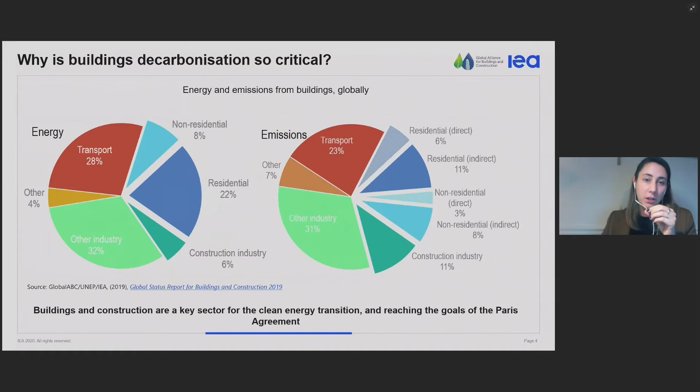Martina touched on this. This is data from the Global Status Report. The reason we're looking at the buildings sector is because buildings and their construction account for a huge part of today's global emissions of carbon dioxide. Almost 40% of energy and almost 40% of total emissions. It's responsible for a huge share of our emissions, but with that huge share also comes much potential for reduction.

If we look at the emission savings potential of the building sector in ASEAN, India, and China combined, this is a figure from the IEA's World Energy Outlook analysis, and it shows that under the policies stated so far, the stated policy scenario, total emissions in the region would increase by about a third by 2040. But with increased ambition on energy efficiency and renewable energy deployment, total emissions from the sector could actually be reduced by two-thirds of what they are today, all while still ensuring universal access to clean cooking and electricity, supporting continued growth in GDP and floor area and access to energy services.

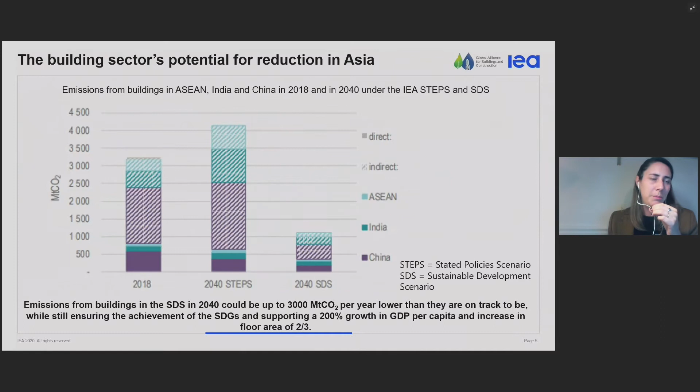If we look at what this scenario would look like, the Sustainable Development Scenario, we see that this would be supported by a fuel mix transitioning from coal to increasing amounts of renewables, so PV, wind and hydro in the region. This would support growth in electricity consumption in buildings, all while maintaining continued growth in per capita electricity consumption and increase in floor area.

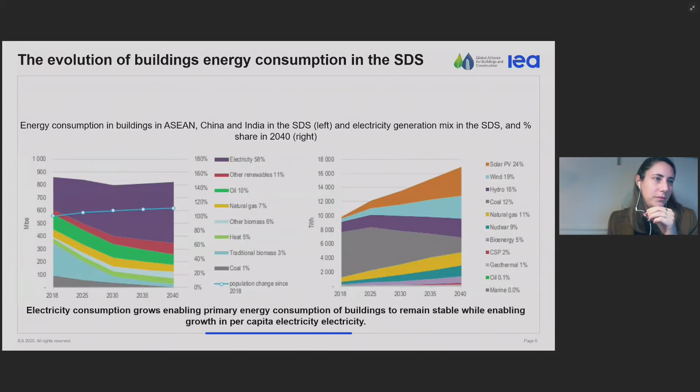As well as being a crucial sector for reducing emissions, buildings are also vectors for achieving several other important benefits, such as providing more thermally comfortable environments which are conducive to better well-being and higher productivity, more affordable and accessible energy services, resilience to climate events, more livable and equitable cities, and increased resource efficiency of materials. The building sector is really where we can unlock all of these different benefits.

Buildings will also be key in interfacing with an increasingly variable renewable power system. They'll increasingly need to provide flexibility. And, as is particularly important in current times, the buildings and construction sector is a huge employer, as Martina mentioned, and holds significant potential for stimulating economic recovery, even more so if this recovery is a green one. We'll be discussing that in more detail later on.

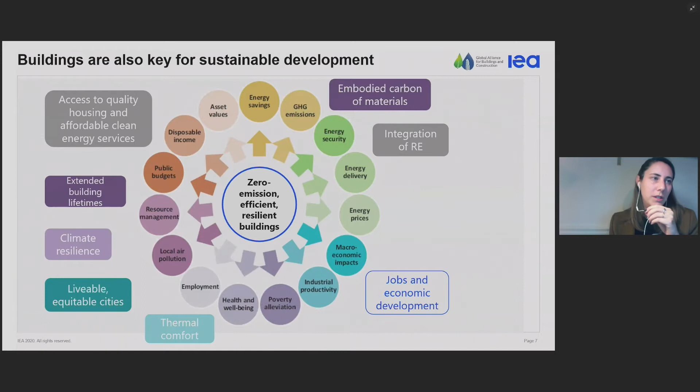In order to understand how to unlock these benefits and develop a common vision for how to work across this large value chain towards achieving net zero carbon buildings, we've been working with the GlobalABC to develop these roadmaps. In total we engaged with about 700 stakeholders across the three regions to build out timelines for each of 8 key themes, spanning urban planning, new buildings, existing buildings, building operations, appliances and systems, materials, resilience, and clean energy, to really capture all of the different facets of the way that buildings impact on energy consumption.

For each of these themes we looked at what is the current status and what is the vision to 2050, setting milestones for the short, mid, and long term. What we found overall was that there is ambition to strive towards net zero carbon buildings by 2050, and there are many excellent examples from across the regions of effective policies across all of these different topics.

We also uncovered the wide range of multiple benefits that motivate different stakeholders and the wide range of stakeholders that there are. But we also saw that there's a strong need for increased integration and coordination across disciplines and across different levels of government, and a need for more mandatory regulatory policies and more data to create baselines from which to develop more targeted policies. We also found that building materials and resilience stood out as topics most in need of data and information, and this was across the three regions that we looked at.

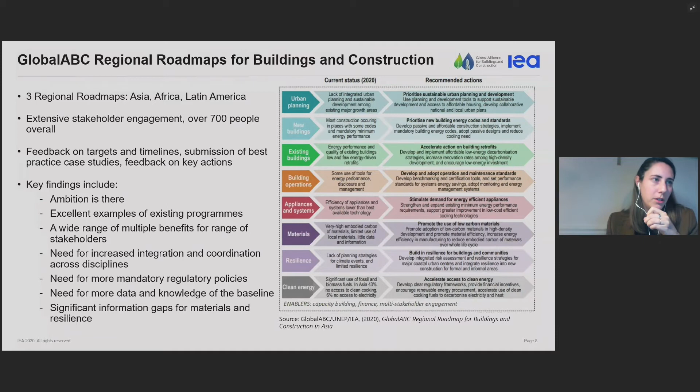So the way that we developed these roadmaps was starting from a 2016 version of a global roadmap. And then that's when we started the process to regionalize these, starting with Latin America, Africa, and Asia.

The methodology was to develop a survey from which to collect information from a wide range of stakeholders in the building sector, to collect information on current status, good policy examples, and performance of technology. We also hosted a series of online workshops and some in-person events, like the Singapore training for green buildings that I mentioned earlier.

We also held a regional roundtable in Bangkok and a meeting with several stakeholders in New Delhi, India. Through this network of stakeholders, we engaged with them to get feedback on our draft. So we had several versions and received feedback on the timelines and the measures proposed.

For each of these 8 themes, the structure was similar. We looked at regional trends on that theme, summarized the key actions, identified the key stakeholders, and then identified policy timelines and regional examples. So what are the key policies and what are the short, medium, and long-term targets for those policies?

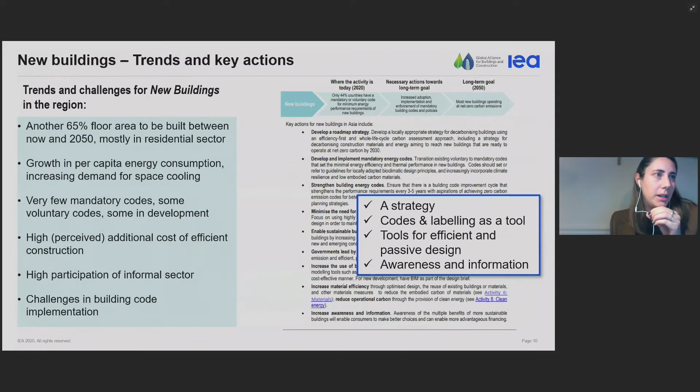Next slide, please. These are examples of the timelines that I mentioned. On the left, we have the policy timeline. The types of policies we talk about in new buildings include building energy codes, but also the aspect of compliance with building energy codes, participation of the informal sector, labeling of building components, building passports, life cycle analysis, and incentives. These were the priority policies that are key to reaching net zero carbon buildings.

You'll see in bold there are 2 sets of targets. In bold is the target for the region, and below that is an aspirational target, recognizing that regions have diversity in terms of some cities being more advanced than others, and some countries being more able to deploy certain policies than others. So we have this 2-tier normal and aspirational target to show these different pathways.

We also identified for each of these topics where there was a lack of information to be able to set a target, or a lack of consensus around what the stakeholders thought would be an adequate target. These are shown in orange, and in red are where we found what we called an ambition gap, where stakeholders did not think that, for example, carrying out life cycle analysis was going to become mainstream by 2050, when it's actually a really important tool to enable better design decisions. That's the sort of model used across the 8 themes.

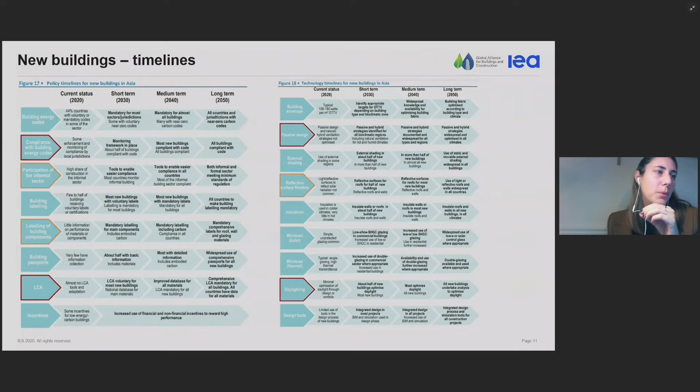Next slide, please. As I mentioned, we also collated examples of programs and policies that we found across the region to showcase some of the really great initiatives already underway. Under the new buildings chapter, we have examples from India, China, Malaysia, Korea, and Singapore, with some links for more information. Next slide, please.

As I mentioned, for each of the sections we also have a subsection on finance, capacity building, and multiple benefits. This involves identifying the most relevant financial mechanisms to deploy the identified measures, and looking at capacity building priorities, categorizing them between training required within government, training of professionals, training of the financial sector and developers, general awareness, and training of product material manufacturers. We also identify the relevant multiple benefits of that sector to use as evidence for implementing these policies.

Now I'll talk you through the highlights of the other sections to describe what sorts of policies are discussed. Within urban planning, for example, we know that Asia Pacific is home to many of the largest cities on Earth and large populations exposed to extreme weather events and climate impacts.

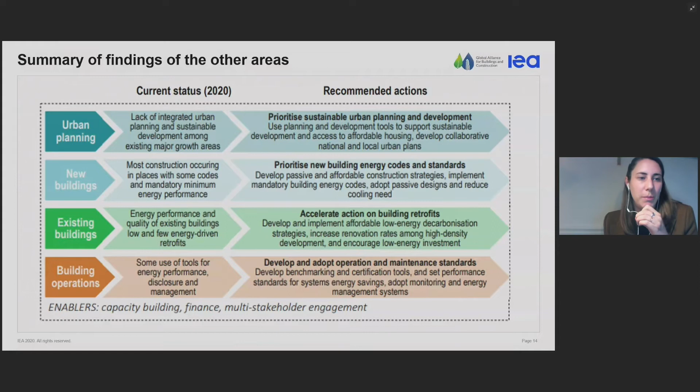In terms of appliances and systems, we talk about setting regularly updated, robust minimum performance standards, combined with comparative informative labeling to facilitate consumer choice, and implementation of incentives and procurement policies to boost efficiency across the entire market and increase access to these appliances. This was an area where regional collaboration for standard and testing harmonization was highlighted as very effective, as is already the case with the harmonization of AC performance standards.

In materials, we're looking at embodied carbon, improving production methods for construction, and identifying and developing low carbon alternative materials and construction techniques. Here the lack of data was quite significant in identifying specific measures, so focus is particularly required on information disclosure and tools to build up this database and enable life cycle decisions to be taken.

Resilience was about adapting cities and buildings to the adverse effects of climate change. The key measures here were about risk mapping and monitoring, development of integrated resilience strategies, and development of preventative measures against water damage and extreme heat.

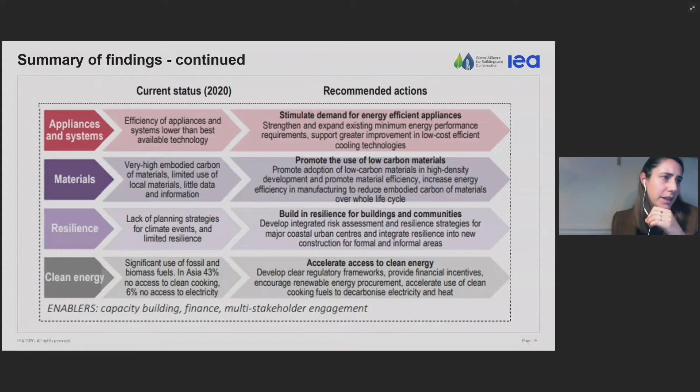I just wanted to pause here and acknowledge that this work was undertaken before the COVID pandemic, and explore what that means.

The public health crisis and economic crisis have actually only strengthened the reason why efficient and healthy buildings are so important, and how valuable the multiple benefits we saw earlier really are. The IEA and the International Monetary Fund worked on a report this year called the Sustainable Recovery Report, in which different measures were analyzed for their contributions to a green economic recovery.

Buildings efficiency consistently came out on top for many reasons: the jobs created are local, measures are often very labor intensive, they can be deployed quickly, and they support the improvement of homes and critical infrastructure such as schools and hospitals. Here we see a snapshot of that analysis showing the amount of jobs created per million dollars of capital investment, and buildings efficiency retrofit and efficiency in new buildings comes out on top.

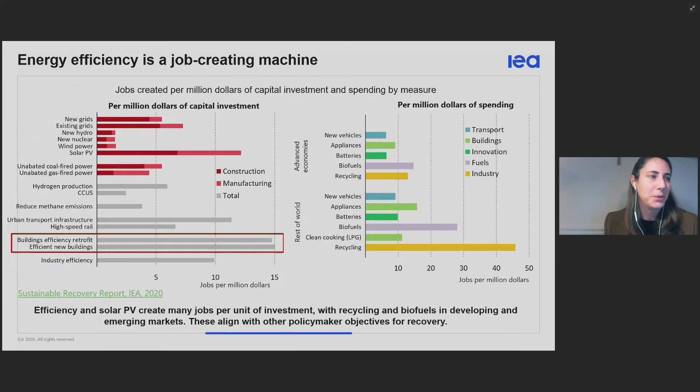So we think this is an opportune moment to boost investment in buildings efficiency and clean energy, and we're looking forward to discussing this later with you in the panel, in the discussion, and through the polls.

We really hope that this process and these documents, the regional roadmaps, will spark regional dialogue and collaboration across these regions, inspire concrete actions and national strategies for decarbonisation and economic recovery, keeping in mind that these measures are in line with the design features of stimulus measures being devised at the moment. We also hope they'll highlight the need to fill the critical information and vision gaps identified in those documents.

The immediate next steps for the IEA: we've already started on a roadmap for mainstreaming energy efficiency in residential buildings in India, and we're also here today to discuss the ASEAN roadmap for buildings and construction and the ASEAN roadmap for space cooling. This is in complement to the other initiatives that Martina has mentioned in Cambodia and in Vietnam. I'll stop there and look forward to answering any questions during the panel discussion.

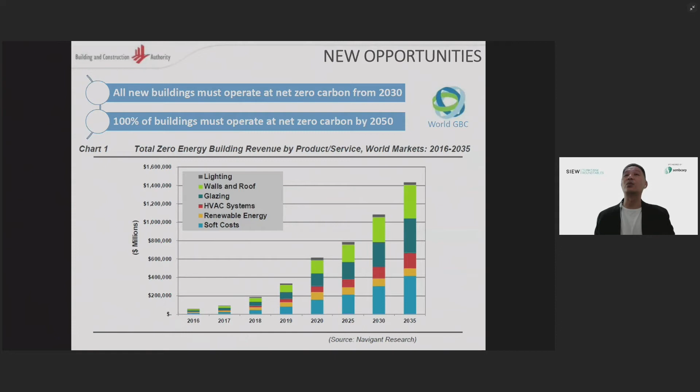So what can we do to overcome these challenges?

Focus on greater building energy efficiency. Back in 2018, the Super Low Energy Program was launched by Minister Lawrence Wong at the International Built Environment Week. This is part of the Building and Construction Authority's continued efforts in green building development since the launch of our Green Mark scheme in 2005.

He outlined the ambition of pushing building energy efficiency towards 80% from 2005 levels by 2030. To achieve this, three key activities were highlighted as instrumental to the success of the Super Low Energy Challenge, namely the SLE Technology Roadmap, Green Mark for Super Low Energy, and the raising of industry capabilities and awareness. I'll go through a bit more about all of these initiatives in detail in the next couple of slides.

But before I do so, let me explain what Super Low Energy is. Using Green Mark as a reference, where Green Mark is a performance rating tool on the environmental sustainability of a building and has a minimum energy efficiency that has to be met, which is code compliant.

For building owners or developers who are more ambitious, they would strive to achieve greater energy efficiency or savings and be certified under Green Mark Platinum, which represents a 50% savings from the baseline. For Green Mark Super Low Energy, it requires an even more stringent energy savings of 60%.

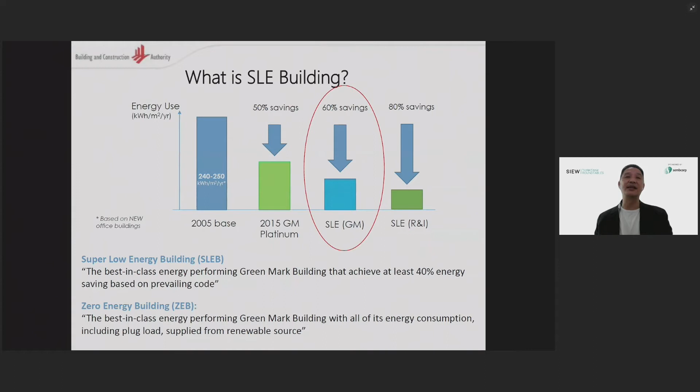To help us achieve SLE, BCA, in collaboration with the industry and academia, developed the Super Low Energy Technology Roadmap. It outlines the broad strategies to help the industry design and develop cost-effective SLE buildings.

The roadmap identifies a range of technologies. When put together, we will be able to achieve SLE. The technologies are grouped into four broad areas, namely passive strategies, active strategies, smart energy management, and renewable energy, where more than 60 technologies have been identified, some of which will still need to be developed through R&D.

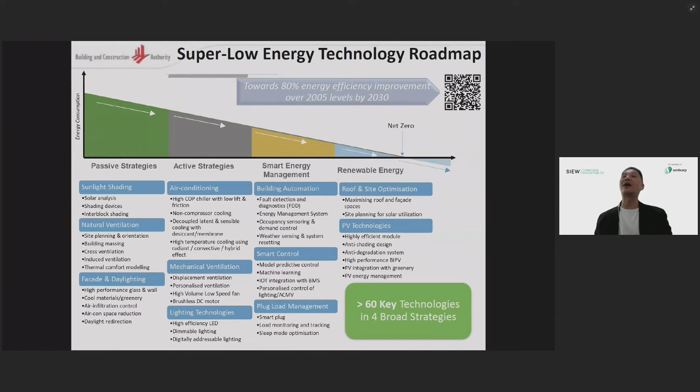The other strategy is to drive large-scale adoption via the Green Mark scheme. This serves as both a recognition of the developers' or building owners' efforts and also for greater deployment of technologies, which is essential to scale up adoption.

The Green Mark scheme, coupled with green building policies and incentive schemes, have been instrumental in stimulating the growth of green buildings in Singapore, with 42% of our gross floor area green, and with a target of achieving 80% by 2030. By adding the SLE component, it would emphasize the commitment of developers and building owners to strive for greater energy efficiency.

To date, we have certified 41 Green Mark SLE buildings, which includes new and existing buildings, with 14 ongoing SLE projects.

Various seminars and workshops were conducted to bring the industry up to speed on SLE. There were opportunities for completed R&D projects to be showcased to industry partners to collaborate and take up the technology. More than 20,000 participants have attended our events.

Site visits were organized to share best practices by some of our forerunners in the built environment, and outreach efforts through our periodic publications.

So how can we help? To achieve these targets, BCA adopts a systemic approach to drive R&I within the industry, from formulation of roadmaps to successive stages of R&D, providing test-bedding platforms such as the BCA Skylab, and to the establishment of standards such as mandatory requirements under Green Mark to drive adoption.

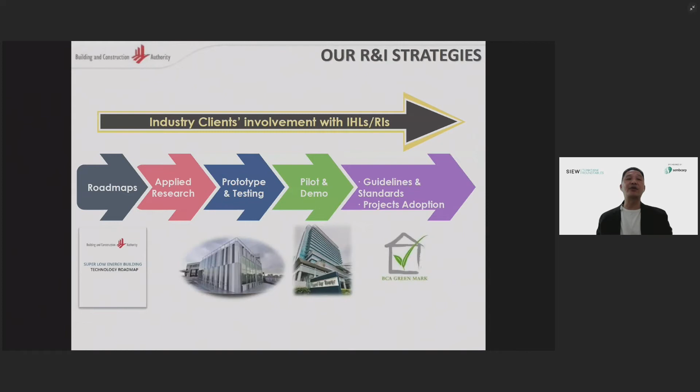Which brings me to the GBIC, which is an integrated RD&D program to drive innovation of green building technologies, including SLE technologies. It was launched in 2014 and funded by the National Research Foundation. It covers R&D, testing, demonstration, knowledge sharing, and stakeholder engagement.

It will help to drive SLE by accelerating the adoption of promising building energy efficient technologies and solutions in actual projects. So far, the GBIC has awarded more than 30 R&D and demonstration building projects.

For R&D, the GBIC focuses on industry-driven research and innovation centered around technologies in the SLE Tech Roadmap to develop practical and cost-effective solutions that can push technology boundaries beyond the current best-in-class performance by 20% or more. Examples of previous GBIC Innovation Challenge calls include the Smart Building Technologies, where 8 projects were awarded last year, and the recent Alternative Cooling Technologies in partnership with the Coolest SG Consortium, where 5 projects were awarded.

Supporting our out-of-lab test-bedding, the BCA Skylab plays a critical role to help validate the performance of technologies in real-world conditions. Modeled after the Lawrence Berkeley National Labs, the Skylab was launched in 2016 as an advanced outdoor test facility for green building technologies in the tropics.

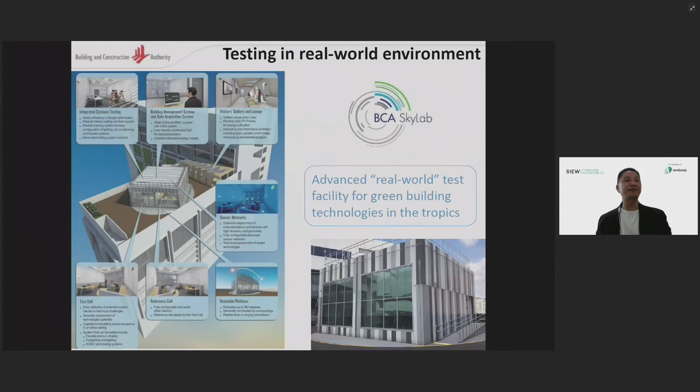To help these technologies move up the TRL scale, or technology readiness level, the GBIC demo was put together to encourage building owners and developers to demonstrate innovative energy efficient technologies in actual buildings. Through successful demonstration, these technologies will be replicated, scaled up and adopted, and eventually go overseas.

Such demonstrations will also help us in our policy formulation, such as raising the baseline, for example mainstreaming SLE with the help of innovative and validated technologies, and also introducing annexes on specific technologies in the Green Mark schemes, which will score additional points if implemented. Most importantly, these demonstrations will provide useful data for setting new benchmarks to help raise the standard within the built environment.

To promote and bring innovations closer to market adoption, the GBIC demo supports large-scale pioneering of promising energy-efficient technologies in actual buildings to validate their performance. These promising technologies could include completed R&D projects from our universities or research institutions, or emerging technologies from industry that have yet to see wider adoption in Singapore, to be pioneered in developers' buildings to showcase practical and replicable solutions.

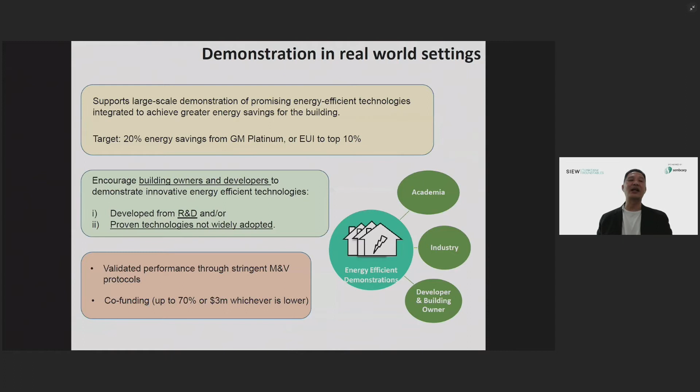By integrating these technologies, the demonstration project should achieve performance of at least 20% energy savings from Green Mark Platinum standards, or top 10% EUI for building typology. This performance is measured with data collected from an array of sensors and meters following international performance measurement and verification protocol standards.

In the next couple of slides, I'll be sharing some of the SLEB exemplary projects demonstrated in Singapore, starting with the Zero Energy Building at the BCA Academy. This is Southeast Asia's first zero energy building, retrofitted from an MEP workshop - mechanical, electrical, and plumbing. Repurposed as an office and institutional building, it adopted more than 30 technologies to reduce energy demand and generate renewable energy via solar PV.

Some of these technologies have seen commercial adoption, such as the underfloor air distribution system and passive displacement cooling. With all these technologies integrated, the Zero Energy Building achieved an exemplary energy performance of 83 kilowatt-hours per meter square per year, about 67% energy savings from the 2005 baseline. In the past 10 years, it has served as a demonstration and educational platform for the industry, academia, and the general public, receiving more than 35,000 visitors.

With the launch of the SLE program, the Zero Energy Building underwent an upgrade to remain relevant to the industry, aiming to achieve 73% energy savings with further reduction of energy use intensity by leveraging emerging technologies. We are able to push the Zero Energy Building to become a positive energy building with 40% energy surplus production by end of 2020 by refreshing our solar PVs.

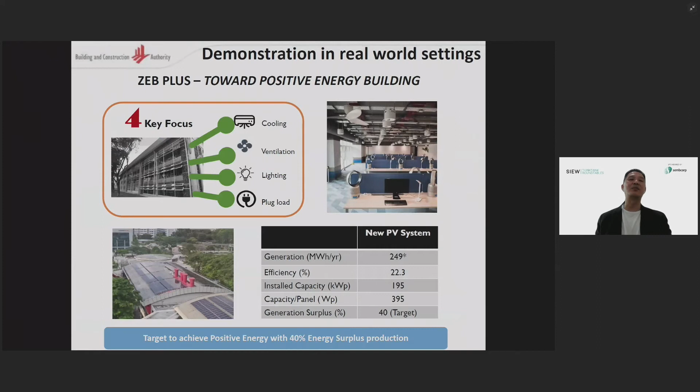Well, could we come to the end of the presentation please, because we're a bit over time. Yep, okay, sure, no problem.

So the next couple of slides are some examples of SLE projects - I'll just run through quickly. What we have here is a mid-rise zero energy building in the city center, which is the SMU Connexion.

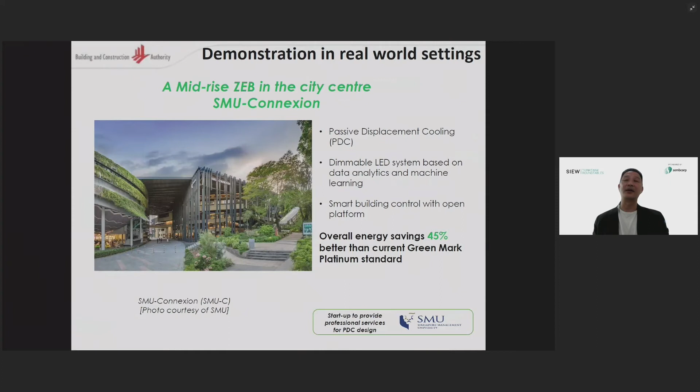It's a 5-story project that's able to achieve net zero with energy efficient technologies such as PDC as well as rooftop solar.

The Keppel Bay Tower project, which received a lot of media attention, was one of the first existing commercial buildings to take up the SLE challenge. They deployed 5 technologies that were solicited from a challenge call together with BCA.

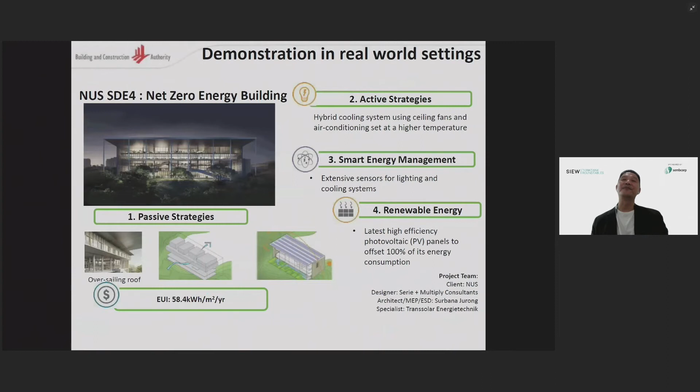With the successful R&D demonstration projects, we also want to showcase all these successful projects with the wider public audience through our Smart Energy SLE Smart Hub portal, which is actually available online. You'll be able to see information on these projects.

There'll be a technology directory where building owners can source for technologies that have been demonstrated before, a smart advisor that will give building owners a high-level assessment of the SLE potential, and lastly a building dashboard which will provide information on various building types for building owners to benchmark against.

So that'll be the end of my presentation. Thank you.

Thank you so much, Noel. I think it's pretty impressive, the richness of the examples that there are already, and the message is very clear: it can be done if you put your minds and your means to it. I'd like to compare it to how Singapore managed the water issue, turning what was a weakness into a real strength.

Let us hold that thought as I turn to Vietnam. Ms. Kim Tor is the Senior Program Officer of PEEB, the Building Energy Efficiency Program, working out of the GIZ office in Vietnam. She acts as technical project and policy advisor to the Ministry of Construction. In the past 20 years she has held different positions providing technical assistance in the buildings and construction space, both at the national and subnational level. She reviewed the Vietnam nationally determined contribution roadmap for a low carbon, climate resilient buildings and construction sector in Vietnam, Vision to 2050, and co-authored key studies including feasibility on green financing for energy efficient and low emission housing, and non-monetary incentives to promote energy efficient and low emission housing in Vietnam. The floor is yours.

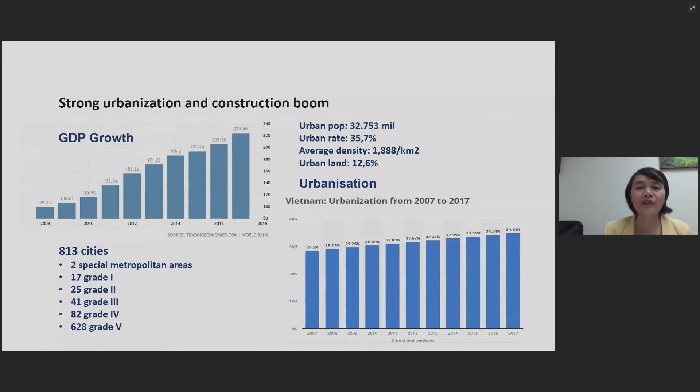Seeing these circumstances, the government has very much awareness that we have to act now in many dimensions, that our growth needs to be more green. So the Vietnam Green Growth Strategy and Action Plan for the next 10 years is now under revision. We have had it for the last 10 years already. And now more action needs to be done at the sectoral level, so that action can really be deployed at the sector. And now we're talking about our construction sector.

So the government is now also doing amendment on our Law on Environmental Protection, LEP, and the government is also revising our Construction Law and the Law on Housing. Our efforts now, in order to make use of the NDC building and construction roadmap, is to try to incorporate those concepts into our law revisions so that low carbon building can have a name, a terminology, into our law text, the body text of the law, so it can really be put into effect rather than only studied, researched, or demonstrated.

We want this program to happen in this country. And in order to do so, the Ministry of Construction just last month already issued the action plan on implementation of the Paris Agreement within the building sector - the first one in the country. While the government still puts it under the umbrella of the Ministry of Natural Resources and Environment? The building sector has already made its own action plan for implementing the Paris Agreement.

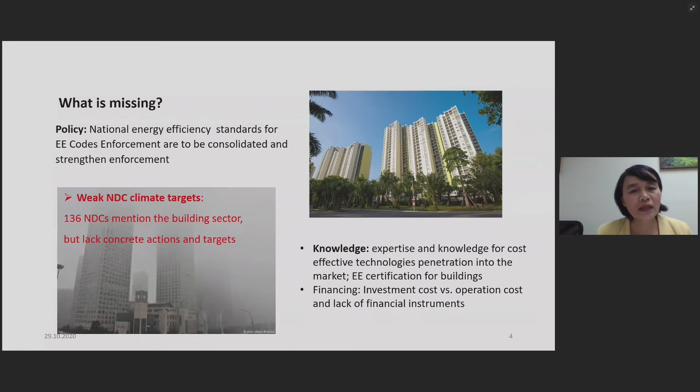So in terms of our contribution to the commitment that the government of Vietnam made internationally on the NDC, we will try to contribute from the building and construction sector so that the government can really achieve it. It could not be done without the construction and building sector, as you can see the numbers on the slide.

For our NDC building roadmap approach, we highly appreciate that the regional roadmap already provides us a good approach and methodology, so that we can present it to the government. The Ministry of Construction really appreciates the comprehensive approach presented in the regional roadmap, touching on all 8 pillars of the construction sector: urban planning and development, and newly constructed buildings.

And slightly on building retrofit, the weakest of our residential buildings now. Retrofit is a big challenge in Vietnam as well, but also in building operation, and then the use of energy efficient building systems and smart building systems.

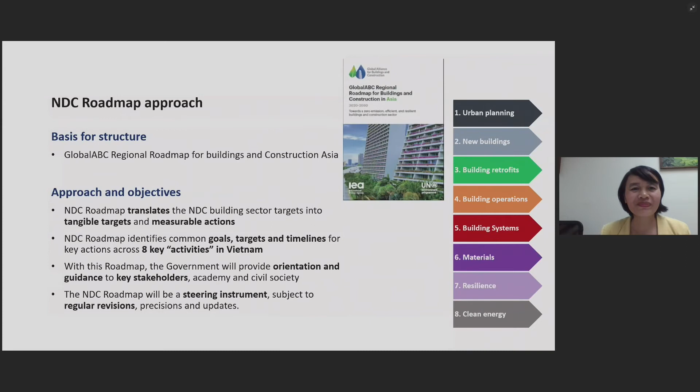So that is the last slide on our roadmap development. We started it last year in September, and now until November 20 we will come up with some technical stakeholders to finalize our draft, and then from next year we can initiate the political adoption of the NDC roadmap following the regional roadmap. And then all the ministries here will present feedback on our process. Thank you very much.

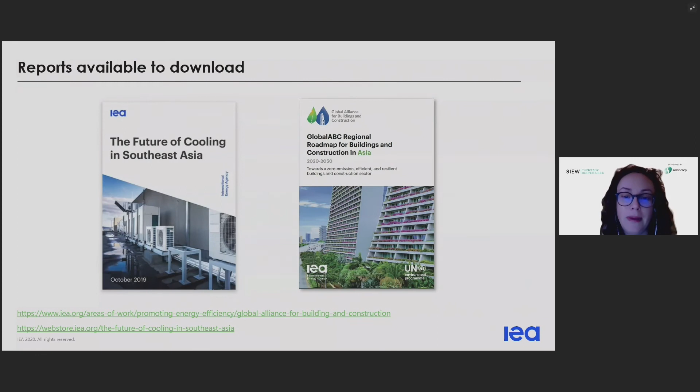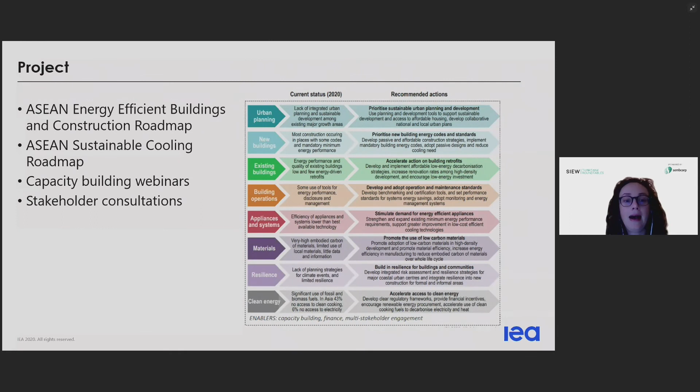Next slide, please. So over the next 12 months, we'll be calling out to all of you to get in contact with us to share your knowledge and experience with us as we dive into the road mapping process. As we mentioned, we'll be developing a roadmap for energy efficient buildings and construction for the ASEAN region and a specific roadmap on space cooling. We'll run a series of webinars on both topics, so please keep an eye out for those. We'd really love to have you involved. And something that's really important to us is stakeholder consultation. So getting your opinion and your experience in making these documents as useful as possible is our number one goal. Next slide, please.

So we have a very tight timeframe to deliver this work. We have one year to do this, so we're really keen to get your thoughts.

Just to say that in 2019, in cooling, we produced the Future of Cooling report that I mentioned and presented these results to the ASEAN community.

This year we've been working, looking at digital tools to really take a deep dive into data collection. We worked with a company called Big2Great in Denmark, who use web scraping to scrape websites for information. So we collected some data particularly from Indonesia, so that we could get a better understanding of the air conditioning and refrigeration market there.

We also worked with a company called Premise, who uses a crowdsourcing app to ask consumers to collect information about products available in the market. We did this study in Vietnam, Thailand and Indonesia, and it gave us a wealth of new data that we didn't have before. We're currently presenting that data back to governments, and this work ties into the development of our new cooling roadmap.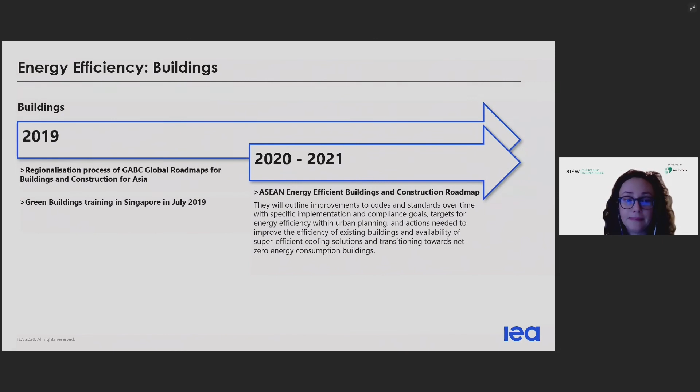My presentation was only very brief this morning, but I just wanted to give you an overview of what we're doing going forward from now to the end of next year. I'd really encourage you to reach out to me or any of the colleagues on the call today to share your experiences and knowledge, and we'd really like to include you in any stakeholder consultations we have going forward.

That's all I wanted to say, but now I'm going to hand over to my colleague Ian Hamilton, who is an associate professor at UCL Energy Institute at University College London in the UK, and he'll be running our last session of the day.

This is where we wanted to hear more from you, our audience, through our poll questions. We'll also be engaging with our speakers further, but this session is really focused on discussing the key challenges emerging from the region under the global health pandemic, and ways in which policy actions from governments and global organizations can help build back stronger with a more sustainable and resilient building stock in the future. So Ian, I'll hand over to you.

Thank you very much, Emily, and thank you everybody. I appreciate joining and being a part of this conversation.

I want to take the opportunity, as part of what we're discussing, to look at the implications of the current pandemic and, as Emily suggested, use this as a moment to reframe and reflect on what actions are needed to both support the economic and social recovery alongside the reality of needing to tackle the long-term challenges of climate change.

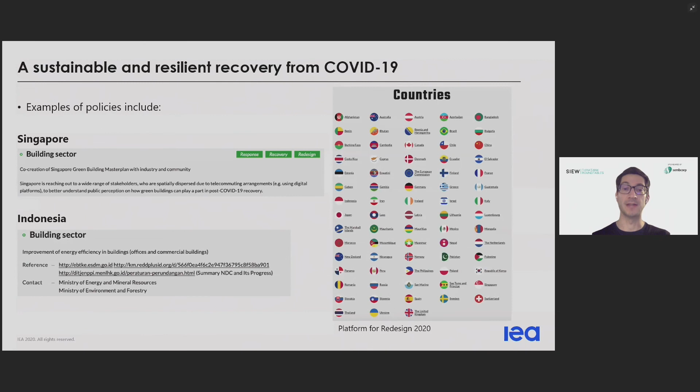Some examples from outside the region include the United Kingdom, where announcements around investment in supporting advanced new building technologies are being made as a way to reduce costs and manage carbon emissions within the industry. There have been a number of various announcements from the UK government on these types of issues. Another example is Denmark, around how they've integrated agreements on renovating the building stock to support both the health implications of COVID in terms of creating safe environments, but also the long-term benefit of the residents in these homes.

So what we've done now is put together a few questions, and I'll comment on these along with my colleagues. I believe Maxine and Noel will help me out here, alongside questions coming from the audience. Just to remind you, in the session as you're watching, under the live discussion, under the polls, you can see after you've submitted a response where the percentage of responses have gone. So I encourage you to do that, because it's quite a helpful way of seeing what your colleagues and others joining the session are suggesting.

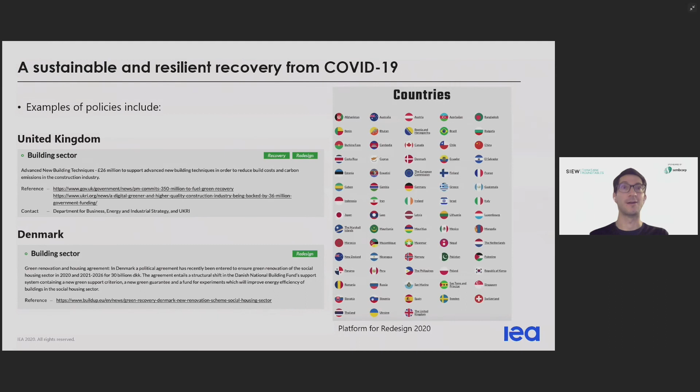So if we go to the next slide. The first question we wanted to tackle was really your understanding of, across the region, where have announcements around stimulus that pertain to energy efficiency been focused. The options we were asking you to consider were building envelopes, heating systems, cooling systems, lighting, appliance equipment, or building management systems.

From the poll response, what we're finding is there's been quite a bit of announcement around cooling systems, and I think you saw that being remarked on by Noel as well as Kim and the speaker from ACE, who make the point around the long-term demands being around cooling. That was 40% for cooling systems, and then 23% suggesting that building management systems are another focus area. I'm not sure whether any of my colleagues have also seen announcements focused in these areas, but I think it's obviously quite an important issue around cooling systems going forward, around how stimulus might be able to support them. Does anybody want to add a remark on this?

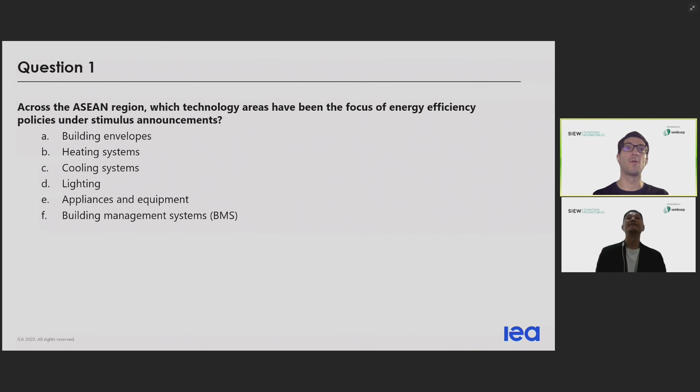Thanks very much, I appreciate that comment. If we go to the next question, what we were asking there is: aside from the obvious pandemic and economic focus, what are the other benefits that have been included in these announcements?

I think here the interesting elements are that very early on in the pandemic, a lot of the energy policies being presented as a response had quite a lot to do with maintaining affordability, and rightly so, given the implications around lockdowns, which are representing themselves in all sorts of different ways across the world.

But going forward, there's been a lot more focus on how energy efficiency and stimulus activities can be coincident with other co-benefits that we might expect.

Looking at the poll questions and respondents, the majority have been around carbon emission reduction, with 43% suggesting that was a primary area of announcement, and then the next being building-related health and well-being.

I think this is actually quite telling - obviously with the pandemic response that's a primary concern, but there's an understanding of the synergy with the longer-term healthy use of space. Given how the familiarity with our homes as both work and personal spaces has really coincided, there's a real recognition of considering in building design going forward what that really means as a more holistic well-being design, not simply just metrics around air quality.

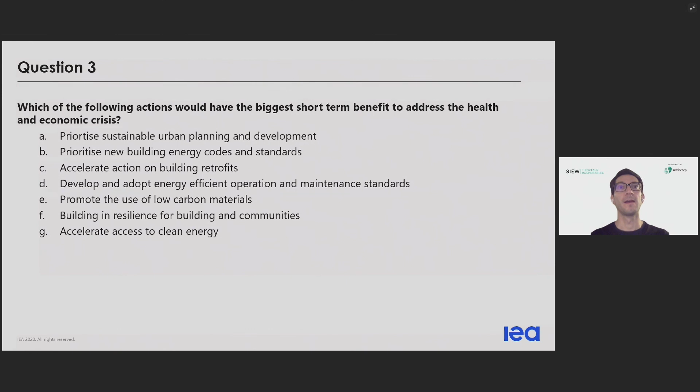Maybe I'll just quickly step to the next question because they're related, and then we can pick up on any remarks from the group, which is: what are the benefits for the longer term? And here the question again is, what actions could be used over the longer term?

Again, the same listing. What I think is interesting here, looking at the poll results, is the prioritization of new building energy codes and standards as being the number one identified element. This, I think, is a very clear signal that - although 33%, because there's a second one around maintenance and adoption of standards on performance - with the use of codes and standards being developed and applied today, we know that they have such a long-term legacy.

I think that the reality is that the buildings we occupy are an example of that. But they can, of course, with refurbishment be improved on. And I think that's, again, a key trick here - there's new building energy codes and standards, and then there's also ways in which one can take consequential improvements to existing buildings, when you begin to trigger a higher standard because of the amount of refurbishment that's going forward. So I think those are really interesting areas.

Just also to say that areas such as accelerating access to clean energy are incredibly important. I think this is where the ability to invest in long-term infrastructure around building integrated renewables, but also obviously grid level renewables for the built environment, is really important around these type of stimulus actions, especially for the longer term. So I invite my colleagues, if they wanted to remark on any of those two related questions - the short-term area of benefit that looks at accelerating retrofit actions, and then the longer term around prioritizing building energy codes and standards.

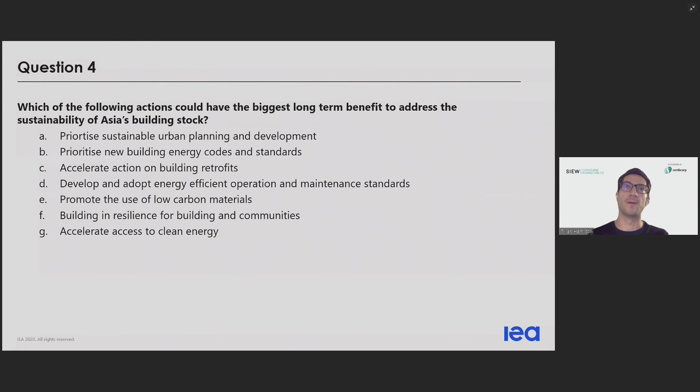In the last question, and I think that just as we're wrapping up, I wanted to remark as well on the final one, the last question around areas of innovation and research and innovation.

And I think this is where the built environment tends to be quite slow at being able to address novelty and new methods of doing things. I think this is where Noel's presentation around the new energy lab in Singapore was a really great example, being able to give a place for companies to come in and test out new technologies. So the question was focused on where we see these things coming forward the next year, the most innovative actions. We just offered three options, and ideally we would have had a way for you to input where you saw that coming from.

But the majority looks to suggest that on-site digital construction technologies are going to be a real key of innovation going forward for the future. And I think that's really interesting, it makes a lot of sense around how these things come together. And then of course, modular building techniques.